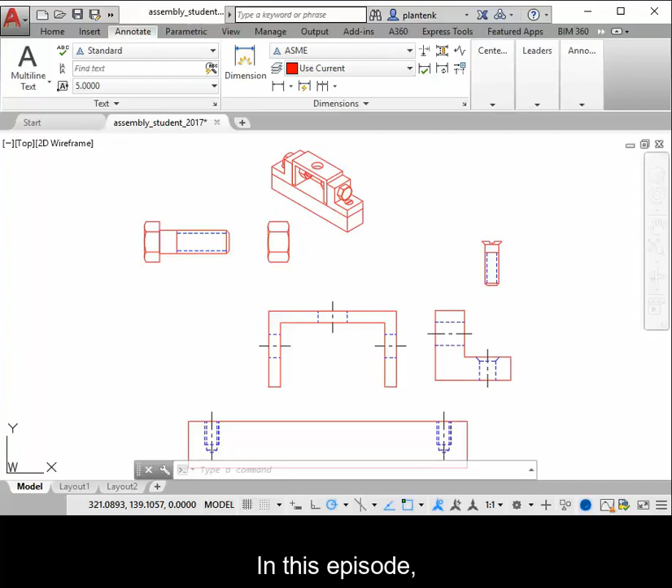In this episode, I'll be taking you through some assembly basics. What you see here are several parts that make up an assembly. The assembly is shown in the isometric view, so we see how all the parts are supposed to fit together, but they're not that way now. So what we need to do is move them into position.

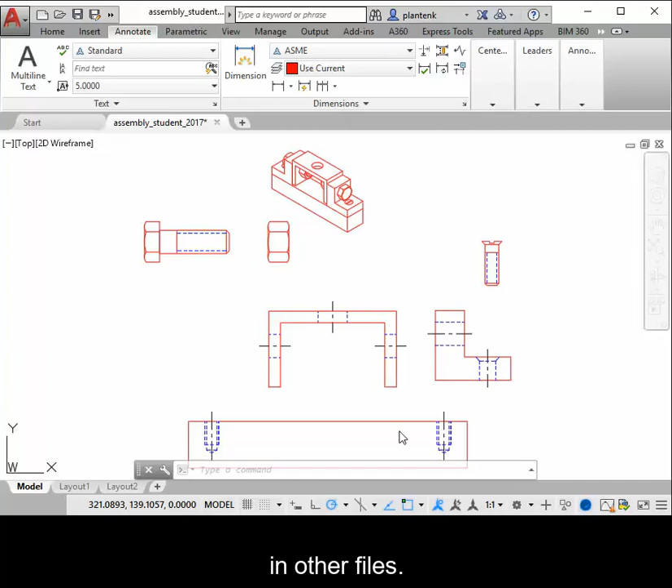Now, these are all parts that have been drawn in other files. So what you do to get them into one file is just open up the part file and copy and paste it into the assembly file. So it's really easy. Now what we're going to do is move them into their functional position.

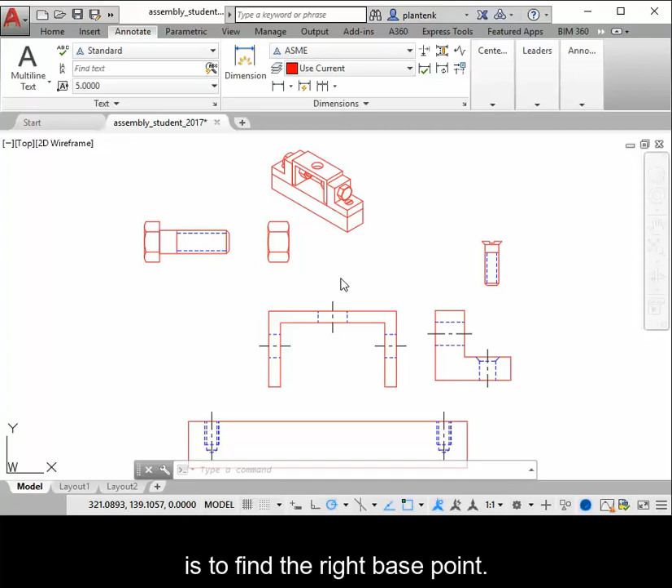Now the only tricky thing here is to find the right base point. When you use the move command, you need to find a point on the first part that matches up with a point on the second part. And not only that, they have to be object snap points. So let's try that.

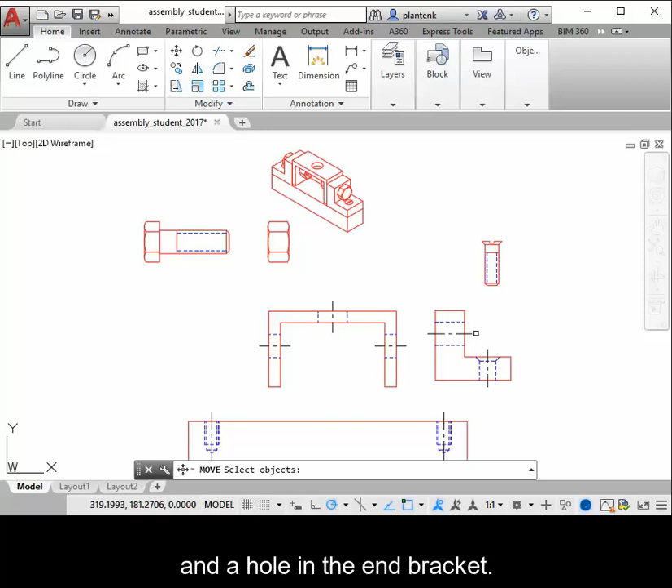So I'll use the move command. Let's say I want to move this part to here. You can see there's a hole in the center plate and a hole in the end bracket, so we want to match those up. So I'm going to move this one and use this point here, which is the center of the hole, and match it up with the center of the hole for the center plate. All right, so now they're in a functional position.

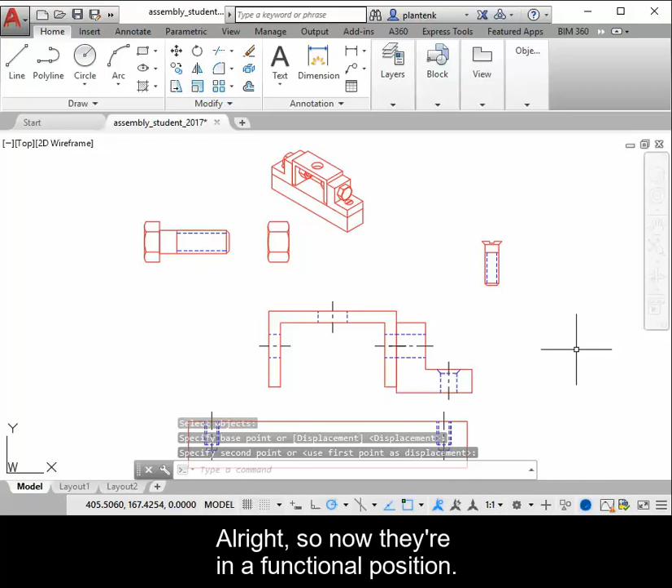Now let's move this, the center plate and the end bracket, and move it down onto the base. So we'll move all of those. This point here, which a screw goes through, matches up with that point. So we will take this point and move it there. There you go.

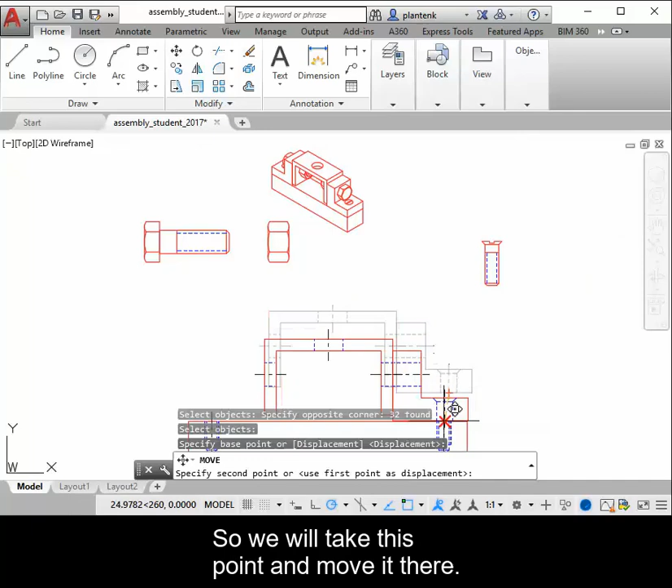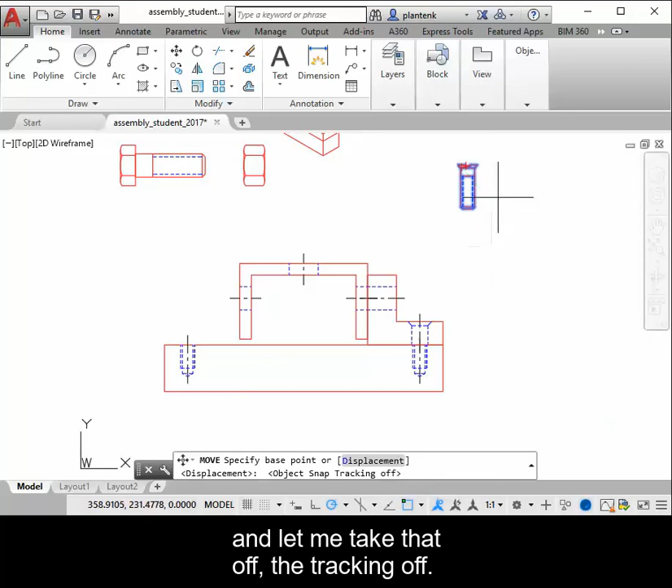And now let's move the screw into position. So this one is a little more tricky, but the bottom of the screw, the bottom of the head of the screw, matches up with the bottom of the countersink. So that's what I'm going to use as my base point. I'm going to use the midpoint of the bottom of the head and put it right here.

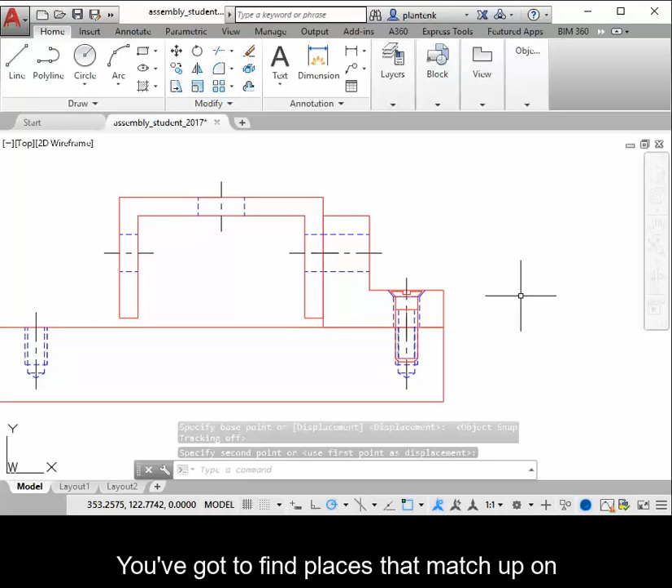There you go. So assemblies are just as easy as that. You've got to find places that match up on one piece and the other.

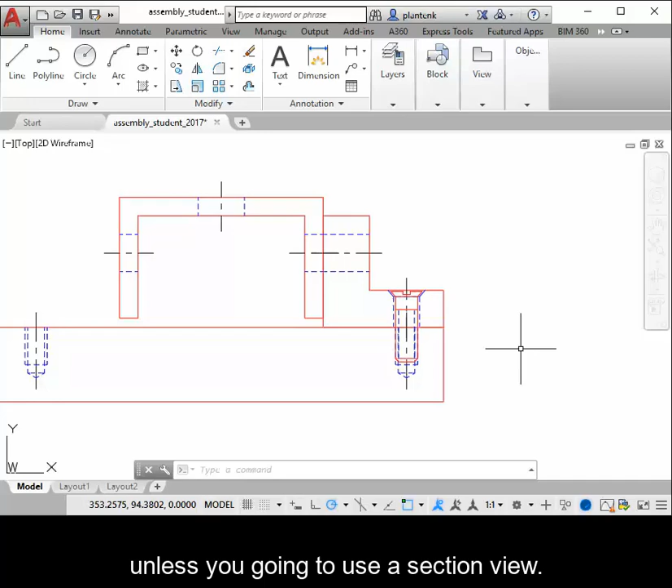All right, so the next thing would be cleanup. You notice that, especially in the screw area, there's a lot of lines overlapping, and the visible lines of the screws need to be hidden, unless you're going to use a section view. So we need to do a lot of cleanup in assemblies. There's a couple things to go over.

If you want to change layers, all you do is click on the line and then click the layer that you want it to go on. All right, so now that's a hidden line.

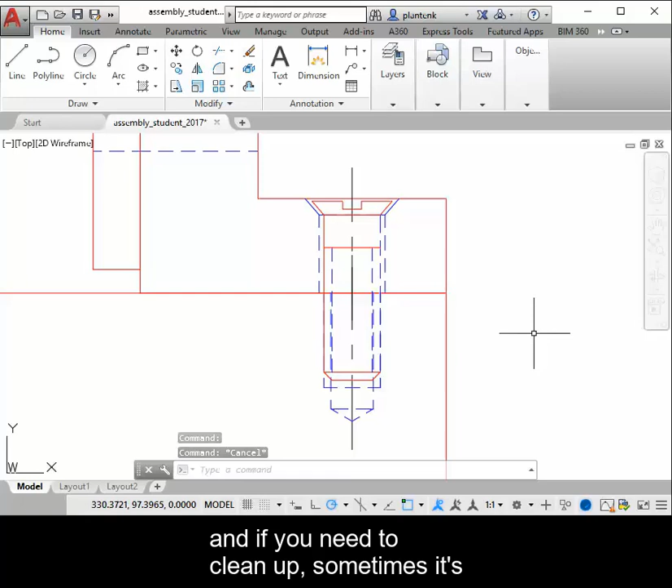And if you need to clean up, sometimes it's not easy because there's lines overlapping. You just have to decide which one you need to get rid of to make it look clear. I mean, that's your goal, you want it to look clear. So you would get in and erase.

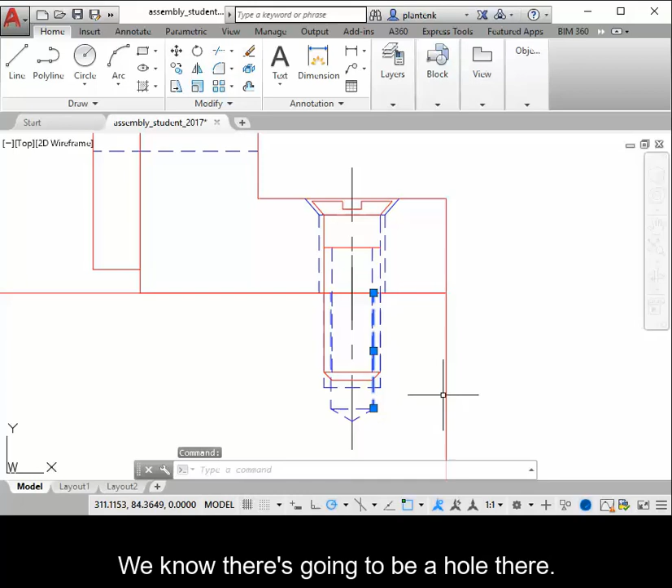So this hole really is not necessary. We know there's going to be a hole there. So if I was to do this assembly, I would just get rid of all the lines that have to do with the hole. That's something that you need to decide.

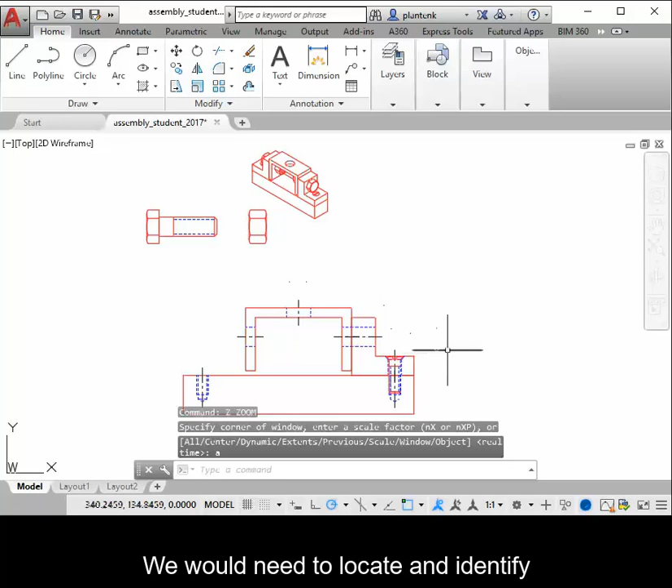So the next thing we need to do is to balloon the assembly. Let's say that we were all completed with it. We would need to locate and identify all the parts in the assembly. Now in the tutorial in the book, it shows you how to create a leader that will do that.

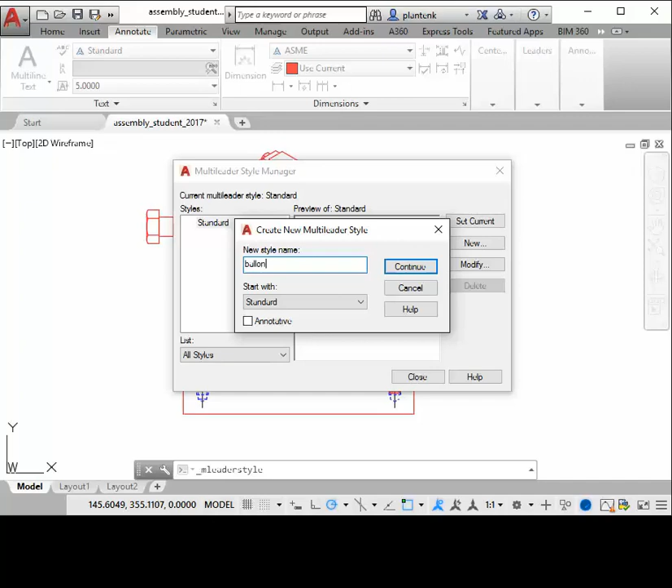But we'll go through that really quickly. So we'll get in and create a new leader. We'll call it balloon. And I spelled that wrong, there we go. What you want to do is make the content a circle, there you go.

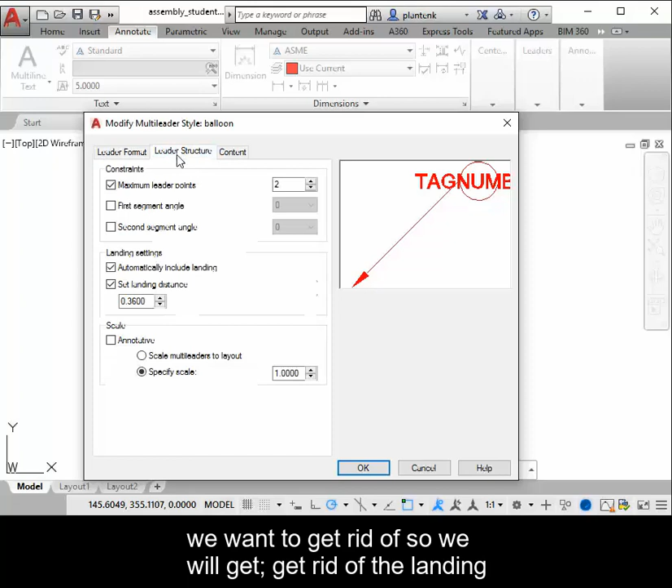And just get in there. I think the landing we want to get rid of. So we will get rid of the landing. And that should be good. Let's see how that works.

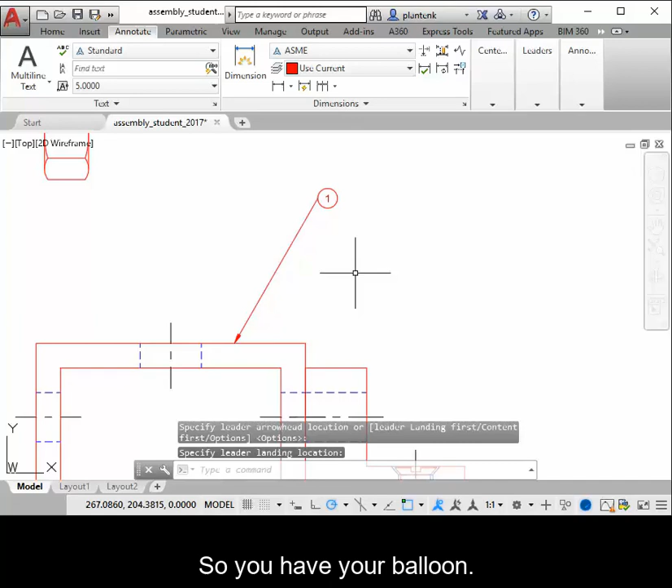All right, so we'll do a new leader. And I don't know what part number it is, but we'll just put a 1 in there, and there you go. So you have your balloon. Now you can adjust where this attaches to the balloon, right?

I usually like to have it down at the bottom, but you can choose where you want to attach it. And the tutorial will show you how to do that. And of course, we want this to be on our dimension layer.

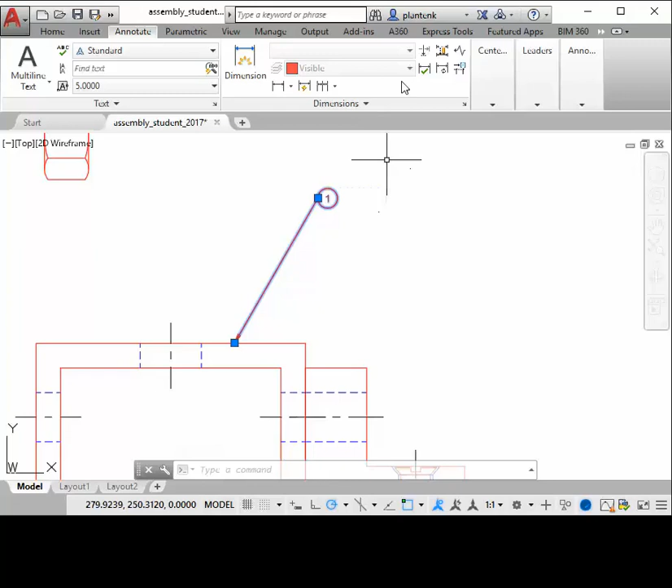And my computer is locking up. All right, so let's put that on the dimension layer. There we go, and we can do another one.

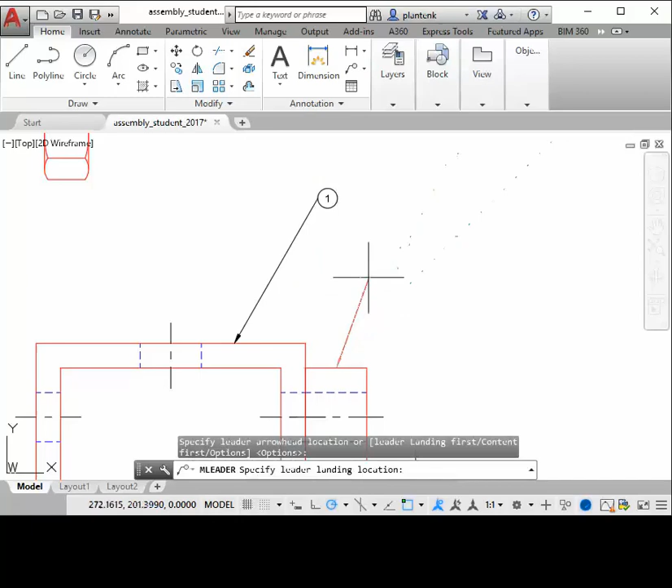So we'll put another one on. And of course, I forgot to put it on the dimension layer first, but we can always take care of that.

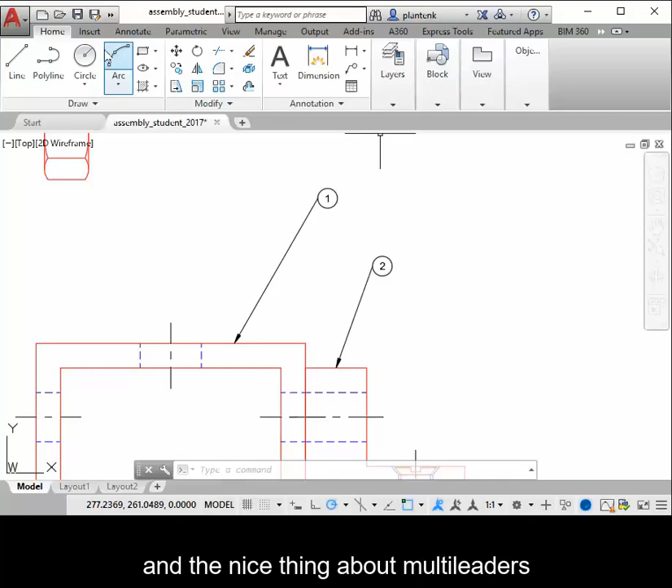All right, now the thing with balloons is that you want them to be lined up, either horizontally or vertically. And the nice thing about multi-leaders is that you can do that. So in the leader command, you can align your leaders. They want you to choose the multi-leaders to align, and then the one that you want to align it with. So you can see how that works.